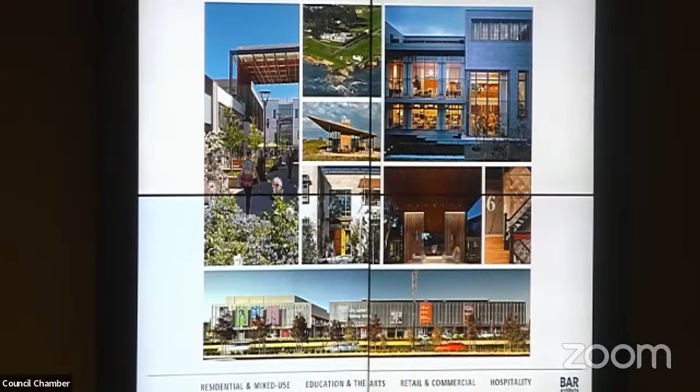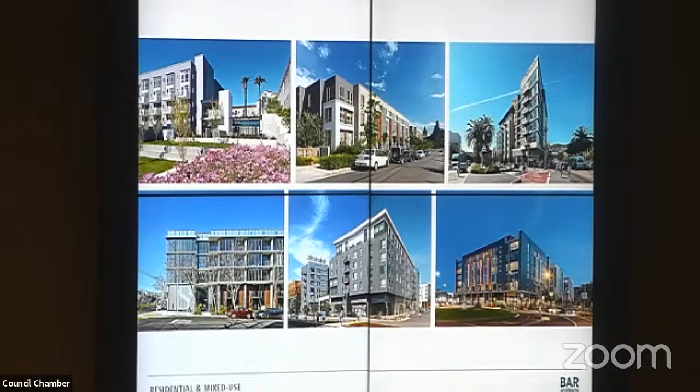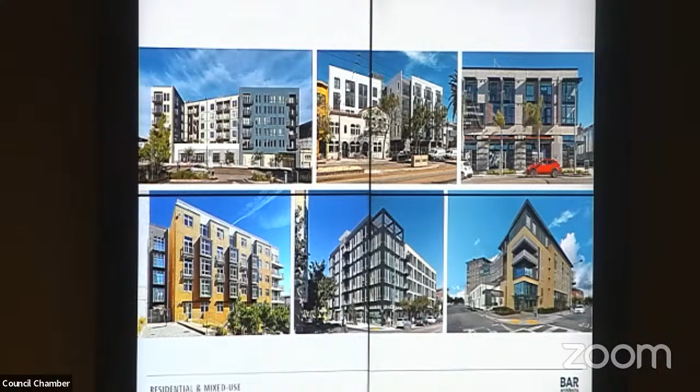We're a firm of about 70 people. Our main office is in San Francisco, and we have an office in LA. The firm has been around for over 50 years, and I've been around for maybe two-thirds of those years. We do a lot of multifamily housing, with projects around the Bay Area, San Francisco, Dublin, in lots of different scales and sizes. Some are historic renovations, some are new construction, but definitely a lot of housing of this similar scale.

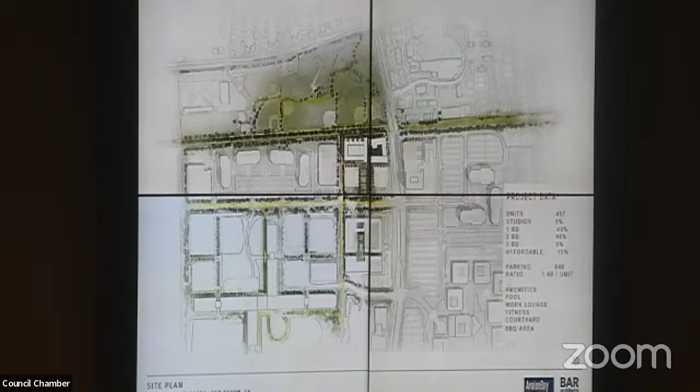This is 457 units. You can see the mix of units—it's mostly 1 and 2 bedroom units, with a handful of studios and 3 bedrooms. The parking ratio is approximately 1.4 spaces per unit, which is 640 spaces. This is what we shared with you a few months ago, back in early November.

Simple white box massing models. We were beginning to think about the scale of the building, where the parking would be, and how the units would break up across the site. We really broke the building into two buildings connected by bridges, with one building at 5 stories—facing Bollinger Canyon—and a 7-story building to the north of that. That building has a garage in the middle that gets wrapped by housing.

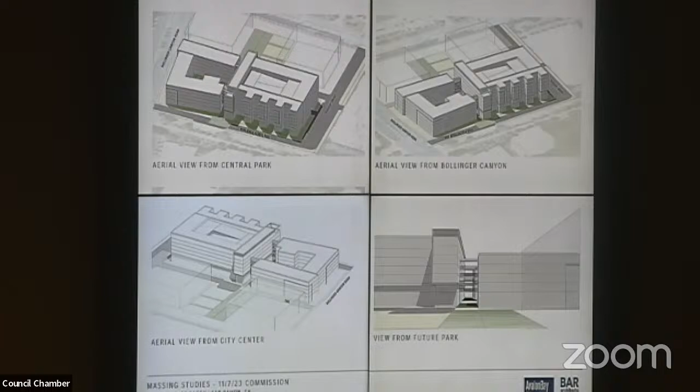So the garage is completely hidden—it has units that kind of wrap around it, people call it a wrap project. And that's the 7-story portion.

A couple of big picture ideas as we thought about the site: if you look at the view in the upper left-hand side, that's looking from up in the air as you're over the city hall and the park. On the left-hand side is Bollinger Canyon. We thought it would be nice to step down the building a little bit on Bollinger.

We could have done something a little bit taller, but based on the program requirements and the goals of Avalon, it allows us to step that portion of the building down to 5 stories, and have the building that was a little further away from the street, buried back in the site, be the taller portion.

What we've been calling the fingers—the vertical elements on the right-hand side—we wanted to break the scale of the building down a little more as it faces the Iron Horse Trail and the park, since hopefully that park and trail will be there for many years. Even though it's a 5- and 7-story building, we think it breaks down the scale nicely, more in keeping with San Ramon.

If you look at the view on the lower left, that's the view facing west, facing City Center. It's trying to be respectful of City Center, which is a very simple, very horizontal building—we wanted to pay a little homage to that. It will also ultimately be partially covered by a couple of future phase buildings you see lightly blocked out there, hopefully with open space in between.

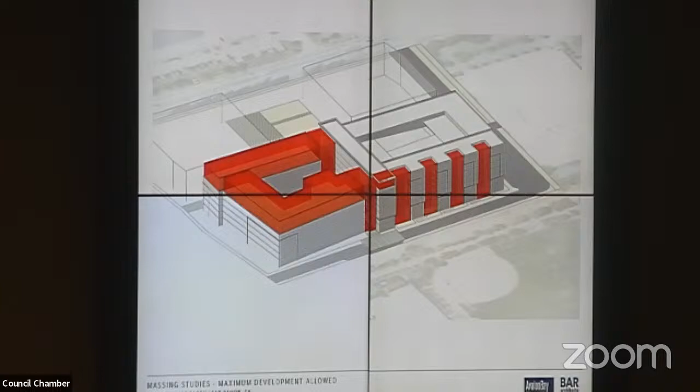This is a quick study to show the massing, and the red is massing that we could have done, still following the design guidelines. The entire building could have been 7-story. We didn't have to do these notches. We just wanted to quickly show you we're trying to follow the guidelines, but also create a little bit of articulation of the building that we thought was appropriate for the site.

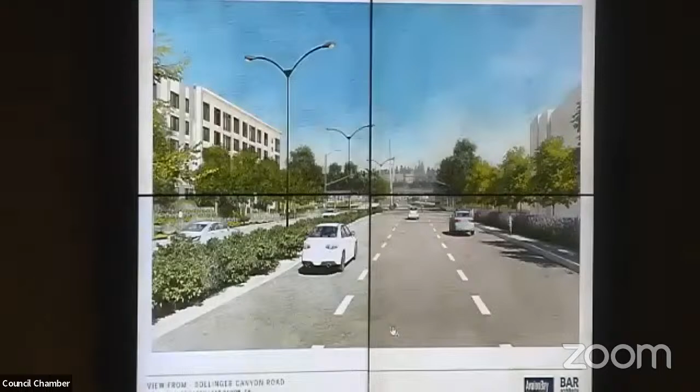So we've got a few renderings to kind of walk you around the site. The first view is looking from Bollinger Canyon, and on the right-hand side we have the drawings from the Related project.

This is just a simple ghosting in of the scale of Related's building on the south side. It's a little hard to see, but you can see the new bridge here, and this is our new proposed building on the left-hand side, 5 stories, with that big buffer. The landscape architect is looking at some nice, interesting berming, low planting, and trees along this parkway. Not sure exactly what Related's doing on their side, but I'm sure they're also doing something nice to enhance Bollinger Canyon.

It's a big apartment. Pardon me? I think it's a big apartment building. It is a big apartment building, yes. The massing we showed is correct, that is the massing that they have. They have some stepping of the building along that edge, a little bit taller than our building along Bollinger.

So this is the view as you're on Bollinger, coming from the east side and turning into the project. The entry experience here features landscaping, new trees, and a new sidewalk pushed in away from Bollinger Canyon to create a better pedestrian feel.

Architecturally, we're trying to do a building that we think is contemporary but not trendy, timeless and simple. We're looking at a few different materials, still working our way through that. Some larger windows on the corners and entryways create interest and a kind of lantern effect, with an upgraded material in this brown area we're trying to determine. In the distance, that long spine has this white frame that wraps around, and we're taking away a couple of units at the top to create a rooftop amenity for residents, so they'll get a nice view of Diablo and the hills to the south and east.

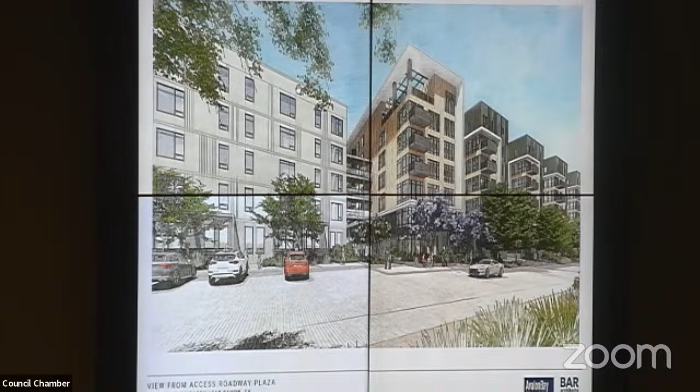Carrying on down that street, this is the entry, and this is the lobby here. The lower building on the left-hand side is the 5-story building with residential units at grade with stoops. This is the bridge that will connect each of the levels across, since everybody will park in the building on the right. And you can see this nice corner element with the outdoor space up on the 7th floor.

And then this series of fingers with outdoor decks looking towards Tam—oh excuse me, Tam, I'm sorry, I lived in Marin. Diablo, different mountain.

As you're coming around the project, this would be looking from the new trail that would connect City Center to Iron Horse Trail. You can see the building here, with the garage entry very discreet, set back and through here. Front stoops all along the edge, with nice landscaping and terraces on a number of the units.

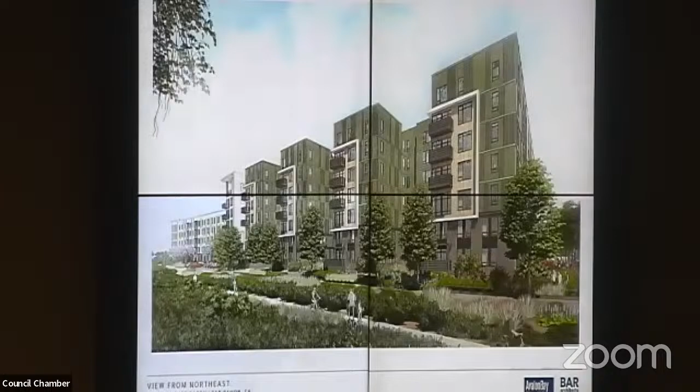This is back on the other side with those fingers, this frame and terraces again, with the view towards Diablo, and really a lot of wonderful landscaping that's in the plan now.

And that's my presentation. Hope that is helpful. Thank you.

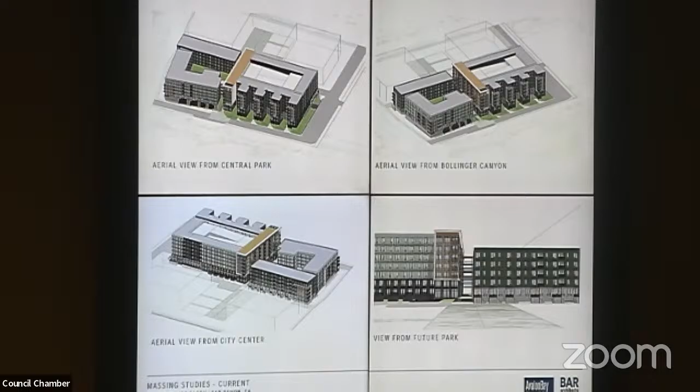Yeah, no, I appreciate it. That's why I was asking, because I know that was part of the conversation. I'm glad you were able to provide some of the details of what has changed, because I know that was a concern along with the parking.

Then my other question is, when I look at these drawings, the word Avalon is plastered on the front side, the back side, and it's big in front of the driveway as well. Is that the same as every Avalon structure you guys build, that you have that much advertising on?

We certainly want signage, of course—we want people to know where they're going. I don't remember if we've dug deep into the signage requirements or restrictions of the city of San Ramon, so we're going to have to do that if we haven't already. Do we need the redundancy shown in the drawings? Probably not. They're literally right next to each other, so that's why I was asking.

Yeah, I hear where you're coming from. We do want clear wayfinding, of course, not just for the brand name but for everything—we want people to know how to get to city center, how to get to the park. Yes, it should be thoughtful wayfinding, but not just everywhere. Thank you, appreciate it.

A clarifying question. I think you said the main entrance will be off of Bollinger, right at that point, so that will be a 4-way stop where you can turn left or right into the project. Is that right? In relationship to the existing traffic light, is it the same traffic light that's there today, or will there be a new entrance? I can't visualize where it is in relation to the entrance.

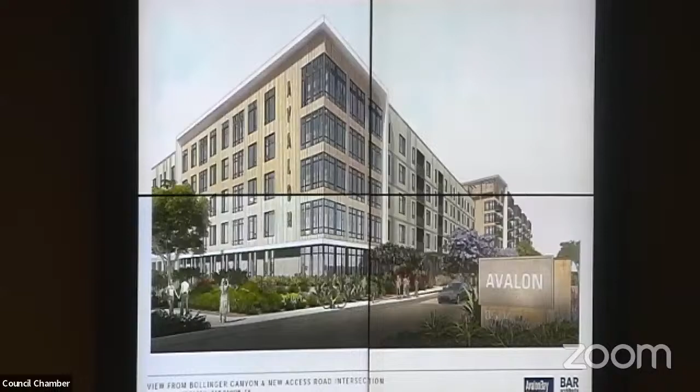So the bridge touches down and hits grade right in this area somewhere, so everything from there on is an elevated bridge. If you were standing on this road, I believe it's a retaining wall, so you would see a wall that would go from zero and start to climb up. The portion that's on Avalon's property is maybe half of the space between the curb and the walkway, the trail - approximately a 10-foot zone on our property that we will be landscaping. We are not planning on putting a sidewalk here; the sidewalk would be against the building because, to your point, there's nowhere to go - you can't get to the bridge or the trail because it's elevated. We've talked about maybe there might be a little bit of a cut-through in through here, but otherwise we would try to direct most people to come to this intersection and onto the trail here.

There's about 20 feet between our curb and the trail, and about half of it would be landscaped by us. There are multiple agencies that own strips of land in between, so this is something we and Sunset are going to continue working on. I'd love to know, would you prefer a fence or not? This is all great feedback for us as we're sorting this out.

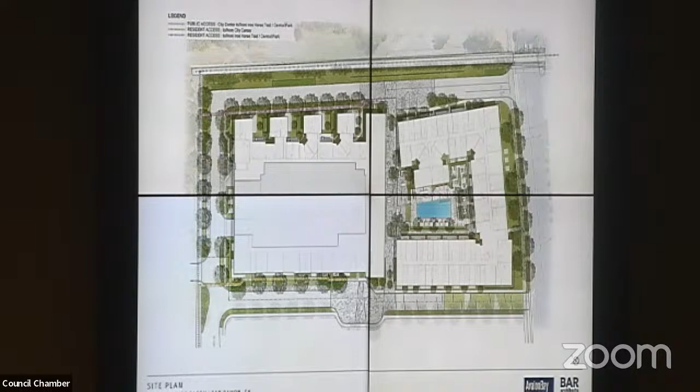Okay, when I first read that, I thought you were referring to the bridges between the two buildings, but I thought that probably wouldn't be considered a common area unless you put a McDonald's or Burger King there, which somehow wasn't in the report.

Question - waiting for the ARB for that one. We'll make a note to him. Maybe you can put an English pub up there. Okay, question.

The building in the back is 7 stories, the building in the front is 5. So there's going to be 2 levels of apartments that are going to overlook the top of the 5-story building, the one that's immediately adjacent to Bollinger. What's going to be on top of that 5-story building?

Is you going to put your HVAC stuff up there? Yes, likely. And be screened from the adjacent building somehow? Yes, likely. I mean, that's the sort of detail we haven't gotten into, but generally that is the case - haven't sorted it out with the team yet. Okay, I guarantee it'll come up. Yeah, I mean again, it's in Avalon's best interest - they want to make sure the residents aren't looking at something that's too unattractive.

I did want to follow up on a comment that Commissioner Curtis made, about the size of the buildings. He brought up the facing of Bollinger, and that you had the fingers facing City Hall, which should also be Central Park, although to some extent it'd be blocked off by the Iron Horse Trail Bridge. But as he pointed out, the area immediately adjacent to Bollinger on the 5-story building does not show much, if any, articulation. I know you said there's a lantern effect on the windows, but the area that directly faces city center on both the 5 and 7-story building seems to lack any significant articulation - they are just long, flat buildings.

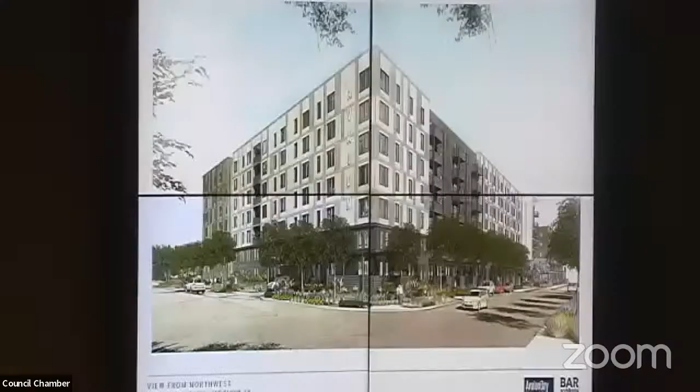So there's the view, the right-hand side of this view would be the side facing west towards city center. We have, again, broken it into 1, 2, 3, 4, a gap, 5, there's another kind of 6 or 7 elements along there.

So we are trying to address that. There's a little bit of articulation on the roof. Some units have decks, some don't. There's some color and material change. There's a 2-story base that runs on the building. So we feel like we have adequately addressed the amount of articulation that we think is appropriate along that facade.

So in terms of where you think you are in the ultimate design of the buildings, how far along are you? Can you give me a percentage, like we're 90% there?

I would say we're pretty far along. We're looking forward to feedback from the Architectural Review Board, but we're in kind of a schematic design phase, so there's still room to think about things.

Okay, all right, that's what I wanted to hear. Thank you, I didn't have any other questions for the applicant. Anybody else have some further questions?

Well, I thank you for coming in here. I am sure we're going to see you again. You'll, of course, get a warm welcome as usual. All right, thank you. Thank you.

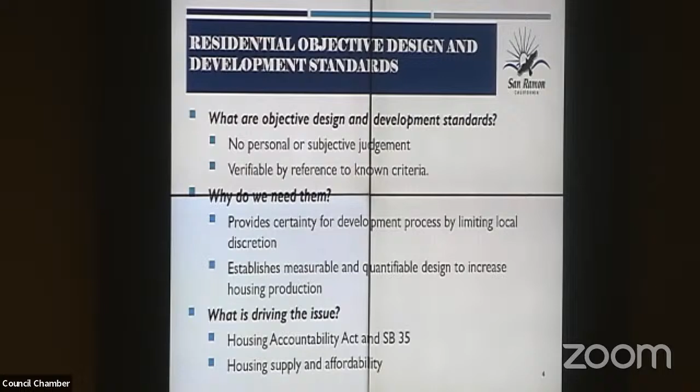So how do you address objective standards? Typically, this is done through your zoning regulations. Now, zoning itself, cross your fingers, should be objective. That's the intent. It's an ordinance. It's codified. But as part of this, what we do is we look back through your zoning regulations to ensure...

...that the standards currently in there, whether they are related to site development or design, are objective, and that they meet the criteria outlined in the Housing Accountability Act. What we do through this process is we look back at past practice that the city has done. So when we think of objective standards, it's not tossing out everything that the city's done previously. We evaluate what's been successful, what the community has already weighed in on, and what's already been vetted and accepted by the community here in San Ramon.

So what we typically do is look at existing plans that have subjective guidelines, identify where those guidelines could be converted to objective standards, look through your typical conditions of approval on projects. There may be something that the Planning Commission routinely recommends as a condition of approval that is an unspoken expectation for projects. Well, that's something that if it's carried through a majority of projects and the commission feels that is a necessary requirement for all projects, whether it's a circulation point, access to recreation or amenities, we make that an objective standard required of every project if it's something routinely put forward as a condition of approval.

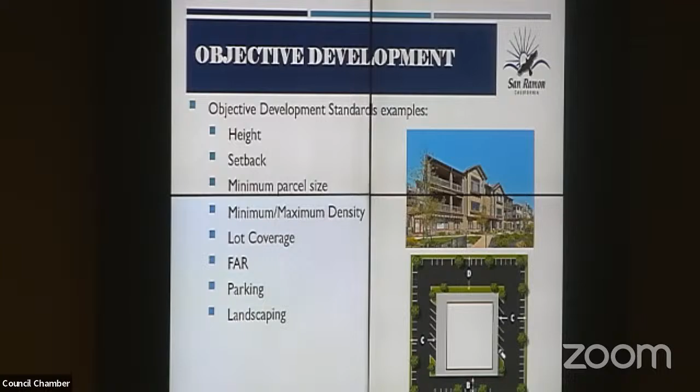What we're really honing on here is looking at the design portion. Design has to do with site design, structure design, on-site circulation design, looking at the massing of buildings, articulation, fenestration - that has to do with your openings, so your doors and windows. Objective standards can also cover color, facade materials, roof line, pitch, and so forth. So this list here is not exhaustive.

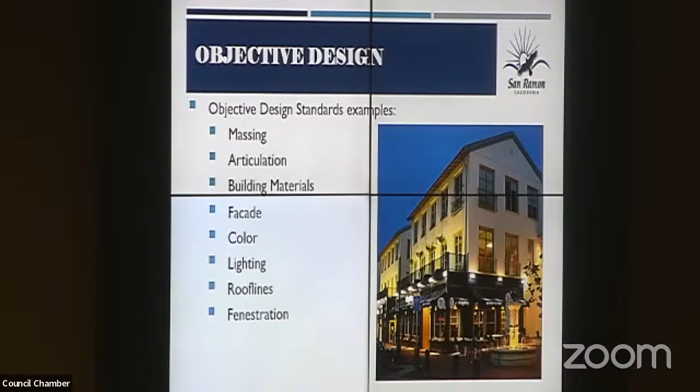It's just an example of what objective standards can cover from a design perspective. And this is what we're looking to implement as part of a proposed set of objective standards for the city's evaluation moving forward as part of this process.

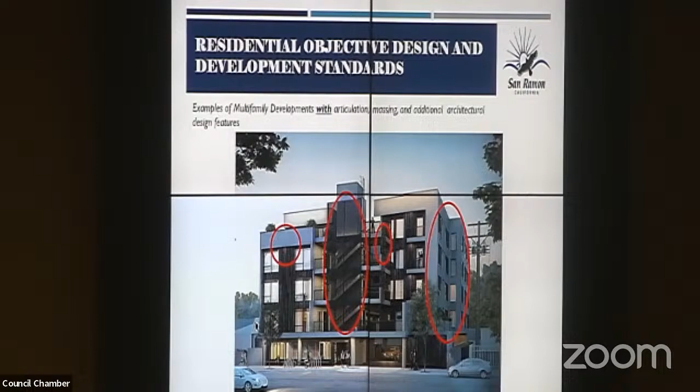I do want to point out too that objective standards, that's one route when a project goes forward for approval. It does not necessarily mean that a project can't come in and provide something that's different or propose something different beyond what the objective standards are. But projects that do not meet the objective standards outlined by the community then have to go through a discretionary process.

So it does not close the door to further creativity. It does not limit architectural excellence of buildings. All it does is sets a base minimum expectation for development that San Ramon expects coming in, and what you as the Planning Commission would expect as you've reviewed projects in the past moving forward, as well as the City Council and overall the community.

What I wanted to do was now shift gears a little bit from that educational standpoint on objective standards and why we're really here, and look at some of your existing city documents and highlight areas where there is the use of subjective language that cannot be used as evaluation criteria.

And this was brought up actually in the last working session of this evening, where there were objective standards and then there was subjective design guidelines, which would be voluntary. And this is kind of what I'm starting to point out here - these could not be used as requirements as they stand now.

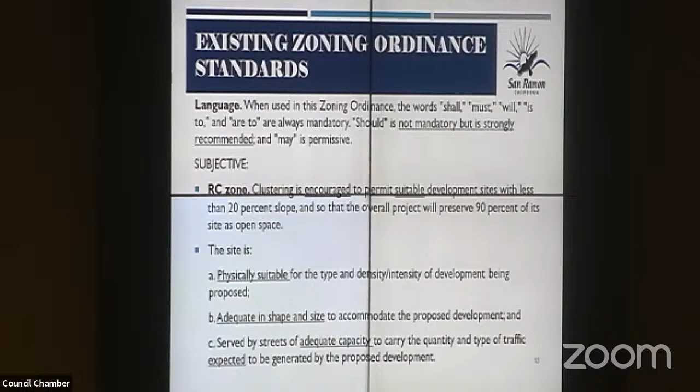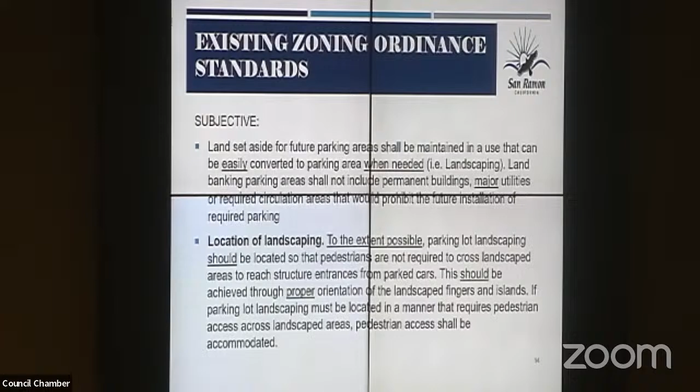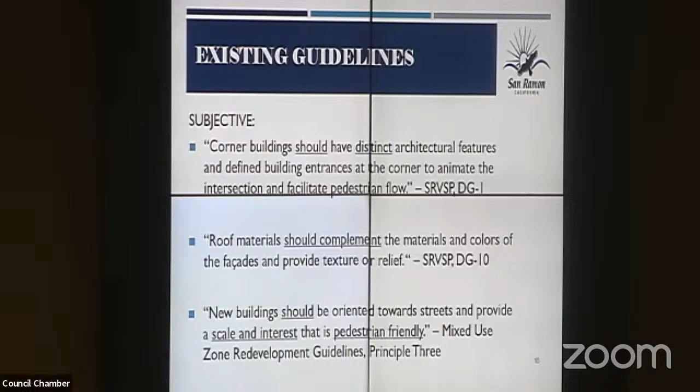These are additional examples in some of your specific plans that have design guideline components that are subjective. Our plan is to evaluate all of your existing planning documents and extract design guidelines that are part of that, and work with your city staff, planning staff, to convert some of those in order to bring forward to the Planning Commission for consideration for an objective standard.

That'll be part of future meetings moving forward, where the commission will have the ability to provide feedback and react to a set of standards that are fundamentally based off successful implementation of design through past projects. We're not reinventing the wheel here - San Ramon has several planning documents with extensive design guidelines that have proven successful.

So we don't necessarily want to toss that out. I think it's important to maintain those, but we need to work with the Planning Commission and City Council to determine when and where those are appropriate in an objective nature. It might not be appropriate citywide, and they wouldn't get carried forward from a design guideline to a standard, but that's the determination we're going to work through in this process.

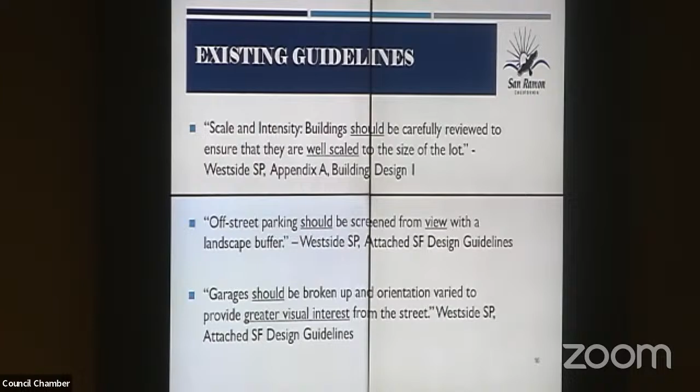So I'm going to take a breather and hand it over to Michael, and he's going to walk through some of the draft objective design standards that were prepared to reflect the implementation of the general plan and the housing element that relate to mixed use, just to give you a flavor of where we're looking to take this process moving forward.

Evening. So last year, we worked with staff to develop an initial set of design standards. Those looked at a combination of new standards and also your existing guidelines, hoping to come up with some new objective standards for mixed use specifically. I'll preface that these are really geared towards mixed use, but mixed use oftentimes has a residential component to it, so a lot of these could be converted into residential standards or specifically commercial standards.

So as Brent mentioned, we developed these standards to be consistent with both your general plan and your housing element. What I'm hoping to do is provide a general overview of the main takeaways in these standards. You have the standards in front of you, but I'd like to provide that higher level overview.

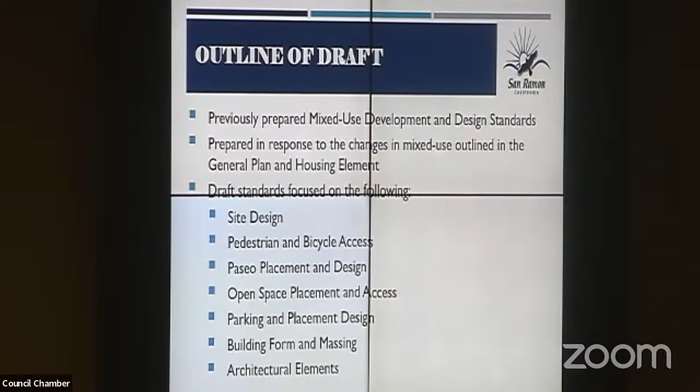One of our first set of standards is site circulation, and that's really important. We are trying to encourage a pedestrian-friendly, pedestrian-oriented development in these mixed-use concepts, so ensuring that pedestrian flow is easy, adequate, and efficient is important.

Another concept is to really locate the structure frontages along areas of pedestrian travel, whether that be fronting open spaces or sidewalks, really pushing the entrances out towards the pedestrian view, tucking your parking structures or parking spaces behind that pedestrian view and making it a really welcoming site for pedestrians.

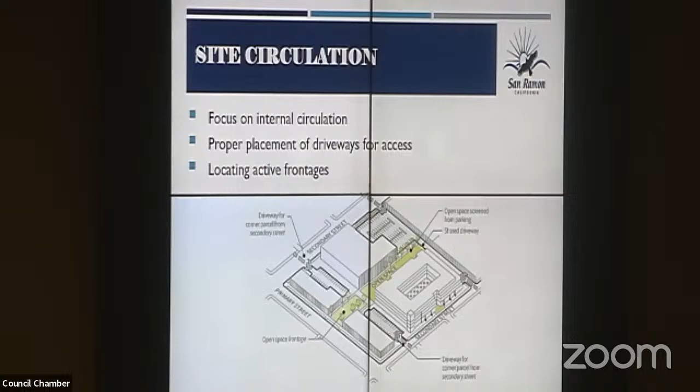In addition to pedestrians, we're also looking at bicycle access. Again, the location of building frontages really plays a role in this. We've all seen developments where you have a sea of parking structure in front of you, and then the development behind it, and we know that's not friendly from a pedestrian standpoint.

So pushing your buildings up to the sidewalk, creating that activation, and pushing those less desirable areas, like your parking areas, to the back.

Another concept we're looking at for pedestrian scale is the activation of ground floor uses. It's an urban design technique creating visual interest. We've all seen a development where it's just a really long single plane on either side, and it feels strange, like you're restricted.

One of the ways we can break that up is through articulating facades. I think we saw that in the picture we showed, and even in the application discussed this evening, this moving back of floors, of structure planes, of structure heights. That's really important, it creates visual interest from a pedestrian standpoint.

Another aspect touched on this evening, which actually bodes well, is the expansion of wider sidewalks. There's a couple of reasons to do that: it's easier for pedestrian flow, you get multimodal use, you can fit bicycles, you can fit strollers. It allows families, visitors to the sites, and residents to move around conveniently and efficiently.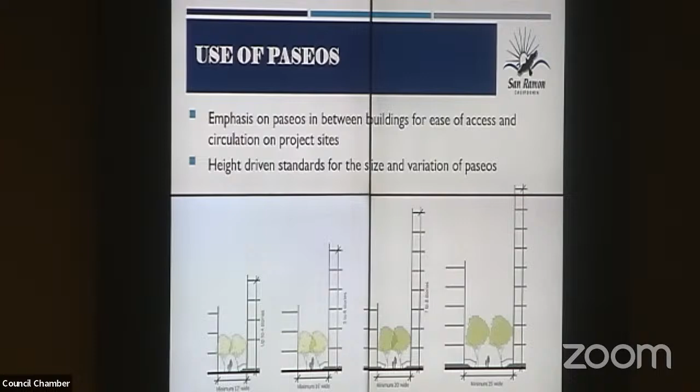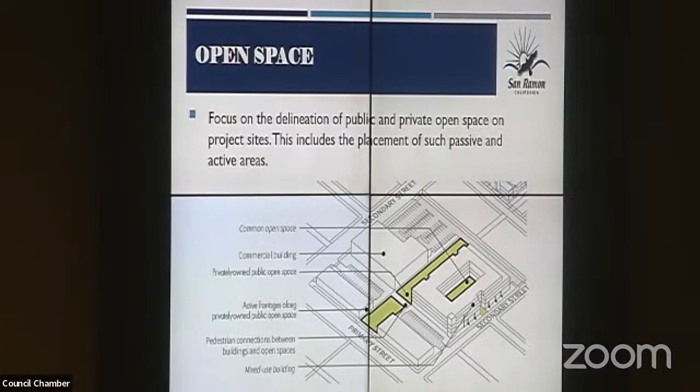Everyone's favorite topic, parking. So touched on this earlier, the location of our parking facilities, whether those be structures or surface lots. Really, we don't want those to be the predominant view of development. We want those tucked back and to encourage that sense of pedestrian friendliness.

So we would encourage the use of standalone parking structures if they were somehow screened, and then really incorporating multi-access points to the parking. We know that we're still a car dependent society, so we can't get rid of that, but we can try to at least increase the ease of traveling not by car.

I think what's important here is what Michael's showing has to do with parking design, not necessarily the parking ratio. Any project that comes in, parking ratio is going to be evaluated against your zoning code and municipal code and the different ratio requirements done by use. This is just the circulation of parking and how it interacts with the project site as well as surrounding properties.

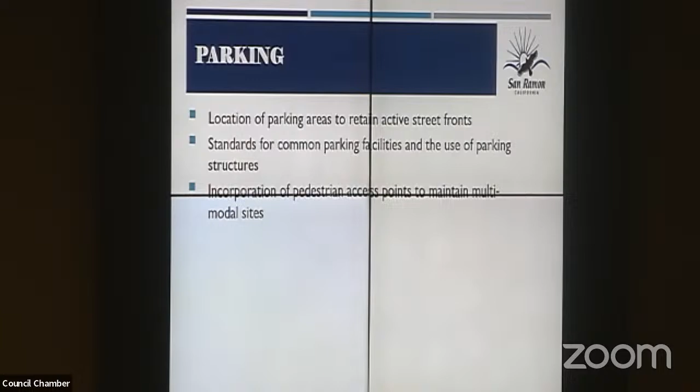It's actually a great point. So a lot of parking standards are already objective - you have 1 space per 2 units, 1.5 space, whatever. So that isn't really what we're addressing. We're really looking at the design of those spaces and trying to do it objectively.

And the next thing I want to touch on is really the architecture, the design of these structures, and that's done through building form and massing. We have the ability to control building form and massing through objective standards.

Particularly for these mixed use standards, we've looked at balconies, the use of fenestration, our architectural articulation, different types of materials, and the stepping back of various wall planes.

And with that, really looking at what is, from those architectural elements, how would the pedestrians experience that? I touched on these wider sidewalks, and that was really done by design to create active frontages.

We want these frontages, whether residential or commercial, to be used actively, creating opportunities for developers and property owners to do that. So allowing there to be some flex space in front of structures where you can have outdoor dining, or you could conduct certain event spaces.

And so we've addressed that through different plantings, different fenestrations, fences. Really, the idea is just to activate those frontages again. And that plays an important consideration when we're looking at mixed use, because you do have those different uses in the same development. So creating something that's cohesive but also usable from a shopper standpoint versus a resident standpoint is something we have to take into consideration.

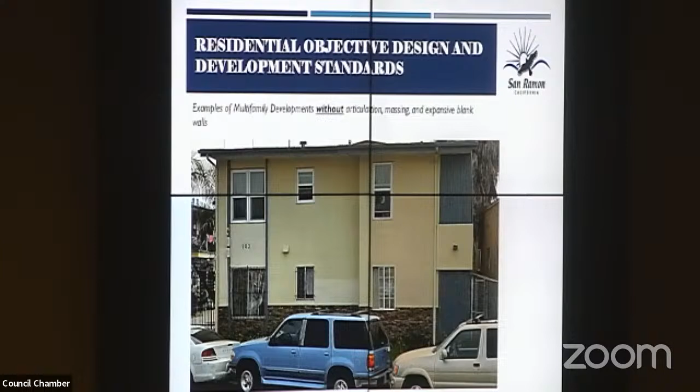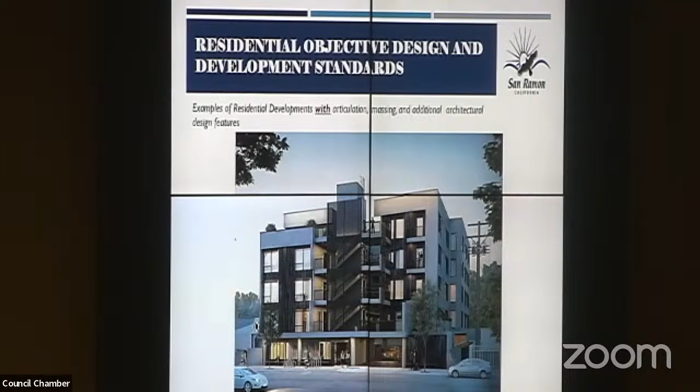So a really common one is articulation of your wall plane, and a lot of the time that's done with a distance trigger. So as a hypothetical, every 50 feet there has to be some articulation in the wall plane, whether that's jutting out into the sidewalk or pushing back into the property. So we could have a standard that any wall plane greater than 50 feet has to have some articulation - 5 feet of articulation every 50 feet. That could be a standard, or we could look at articulation from glazing, like windows. We could talk about windows - I'm not suggesting it, it's very specific - but you could get into how far your windows are set into your wall plane. You can craft articulation that way.

I would recommend that decision really be for the designers. But we can set the big massing parameters - windows and the determination of how those should be designed I think might be too specific for this, for ODDS. The physical layout of the structure is something that we can do.

So as we get much more specific, at what point are we creating just a whole lot of cookie-cutter facilities? It seems like the intent is to actually avoid all that, looking at your two examples here.

Well, I think part of that is the balance - the balance of how into the weeds the objective standards go. There are lots of examples of jurisdictions in California that have done different variations of objective standards. Some have gone as detailed as the width of mullions within your window, down to the variation color scale on a building, down to the shape of stone on the front. That is not flexible - every building is going to look the same.